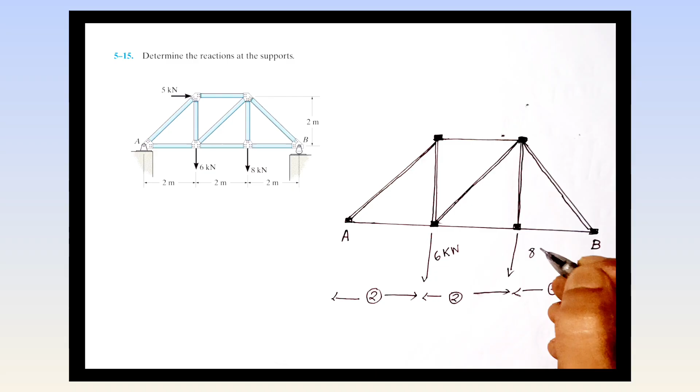At the end of the 2 meter section, the question drops two forces: one 6 kilonewton, other 8 kilonewton. The height h is given as 2 meters, and suddenly from above a 5 kilonewton force attacks to the right side. Show that at height 2 meters, a force of 5 kilonewton acts to the right side along the positive x-axis.

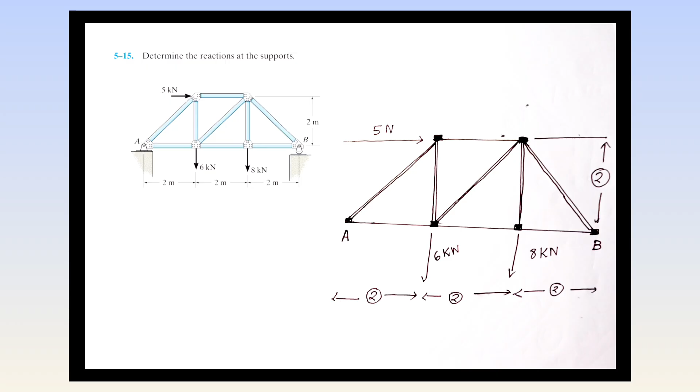So tell me student, what is my approach? What is point A? Here point A is a pin and point B is a roller. Note down: at point A we have a pin support, and at point B we have a roller support, basically the lazy cousin of the pin which just likes to roll around.

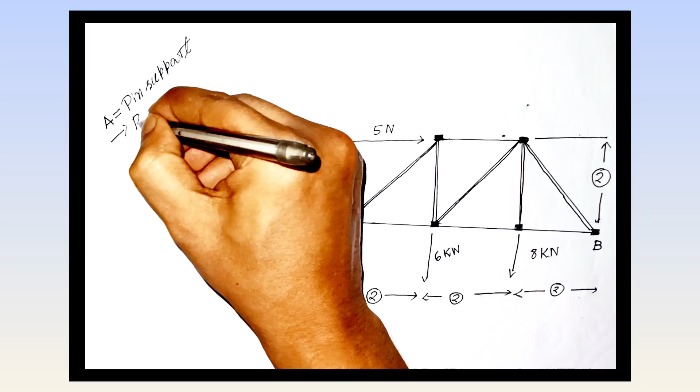At point A, two reactions come as a combo pack: one is Ax, other is Ay. This Ax reaction direction is along the negative x-axis, that is the left hand side, and this is Ay, obviously upper side, because here 6 kilonewton and 8 kilonewton act lower, so Ay must be upper, otherwise how would it be in equilibrium? So B equals roller support, not pin.

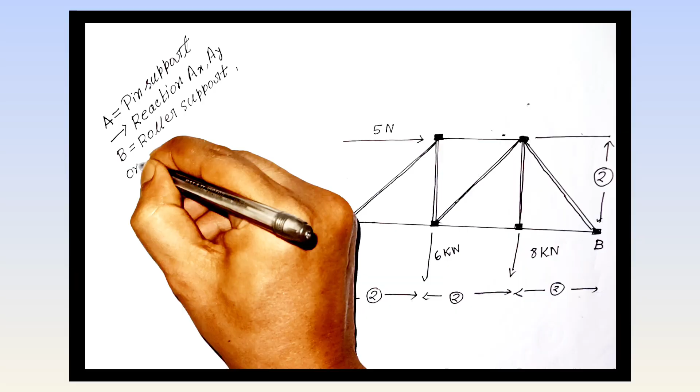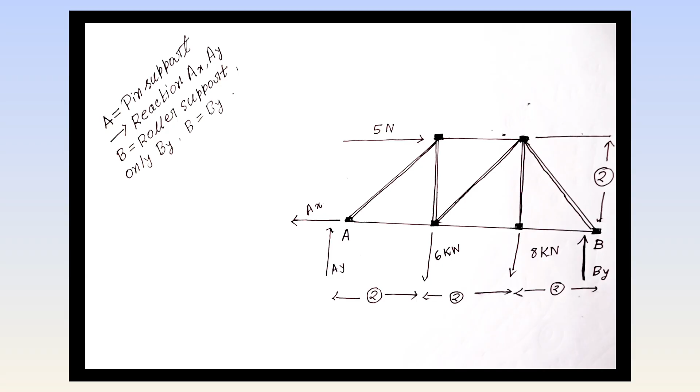So at point B, can you tell me how many components, no component or one component? Drop your comment. Yes, only one component, that is By, no Bx — roller support. B point has only By component, but at point A both components, Ax and Ay. So the unknown terms are Ax, Ay, By. B equals By.

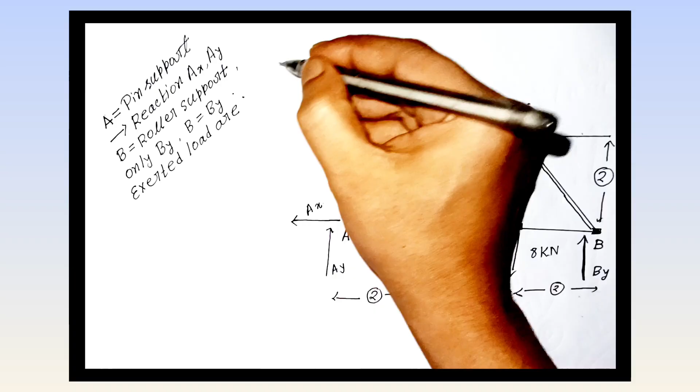Tell me dear student, what is the exerted load? It's 5 kilonewton upper side to the right hand side. Note down, exerted load is 5 kilonewton — sorry, not Newton, this is kilonewton, question says that, not me. So the exerted load is 5 kilonewton to the right hand side along the x-axis.

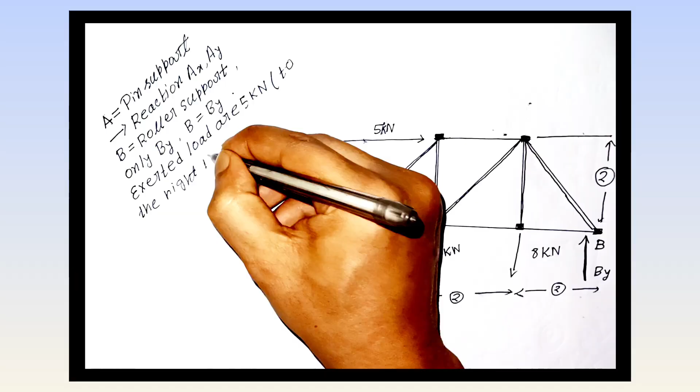Anyway, one force is 5 kilonewton, but the question says there are two other forces: 6 kilonewton and 8 kilonewton. This is minus x, this is plus y, this is minus y, this is plus x — the axis, x-axis, y-axis. At 2 meters from point A, the 6 kilonewton force acts.

That is, you can write 6 kilonewton downward along the negative y-axis, at 2 meters from point A. Note down: 6 kilonewton downward at 2 meters from point A.

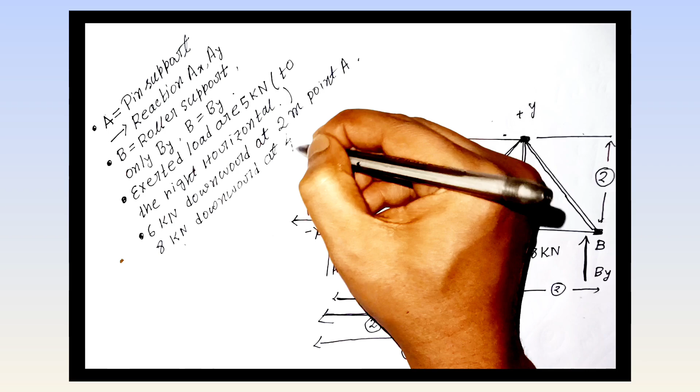Similarly, an 8 kilonewton force acts downward, but not at point A — it's 4 meters from point A (2 plus 2). That is, we can write 8 kilonewton downward at 4 meters from point A. 6 kilonewton at 2, 8 kilonewton at 4, from the same point A.

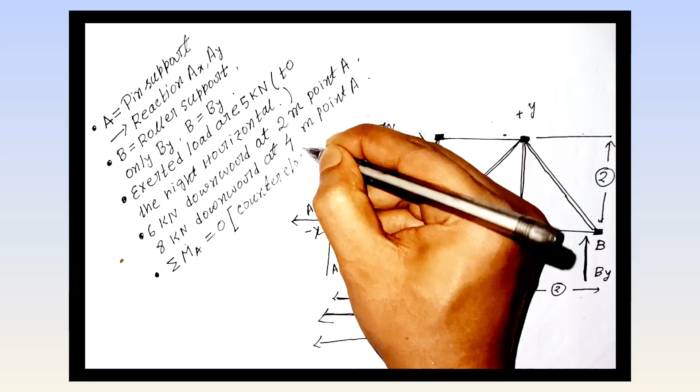Next, let's calculate counterclockwise: summation of moments equal to 0. Now you need strong observation power — watch the drawing. Counterclockwise, remember I make this easy peasy, no tension, very simple, wait and watch.

So this is 6 kilonewton, what is the perpendicular distance? 2. 8 kilonewton, perpendicular distance 4. And By, perpendicular distance 6. So: 6 for 2, 8 for 4, By for 6. That is written as plus By into 6, since By is upper hand, minus 6 kilonewton into 2 since it's downward, minus 8 into 4, equal to 0.

Because summation of moments equals 0, you can calculate and simplify, and the answer automatically pops out. Calculate By — here is no place to write, so I write here. By equals... that is By equal to 7.33 kilonewton.

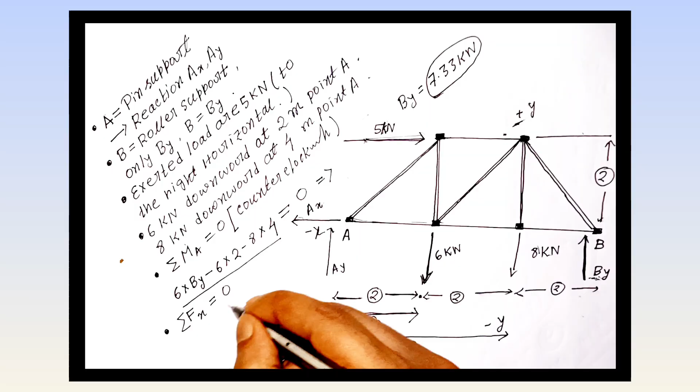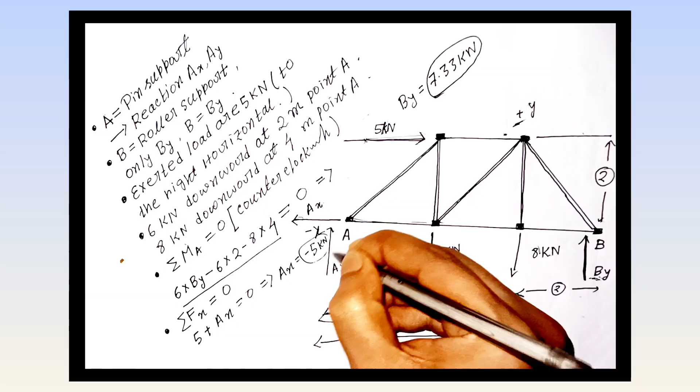Next, summation of Fx equal to 0. Along the x-axis there are only two forces, 5 and Ax. Very clear, very simple: 5 plus Ax equal to 0, that is Ax equal to minus 5 kilonewton. This minus is the negative sign — already I put negative, Ax is on the left hand side, minus x-axis.

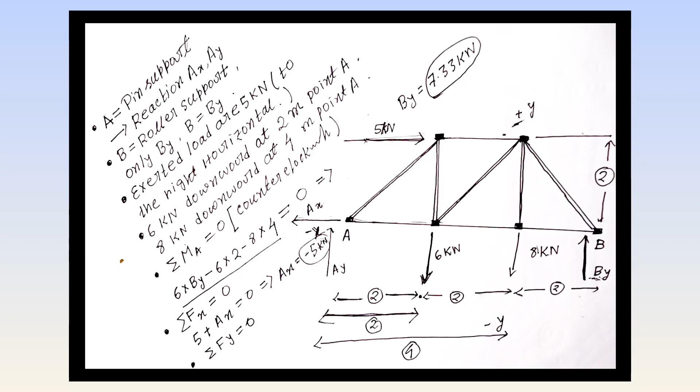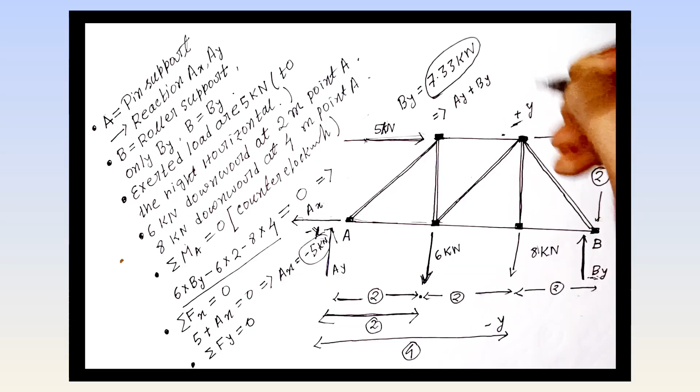Now last step: summation of Fy equal to 0. Along the y-axis we have Ay, By, 6 and 8 — four forces. Upper side Ay and By are positive since upper side means positive y, and 6 and 8 are minus, downward according to the axis, equal to 0.

We already know the value of By, which is 7.33. So easily putting the value of By, you can find Ay. Ay is 14 minus 7.333, so Ay equal to — drop your comment — 6.67 kilonewton.

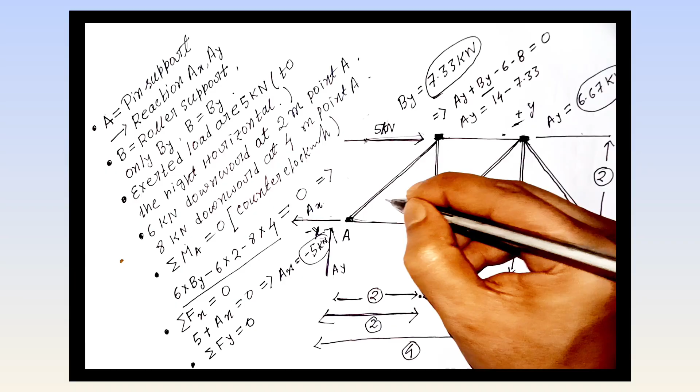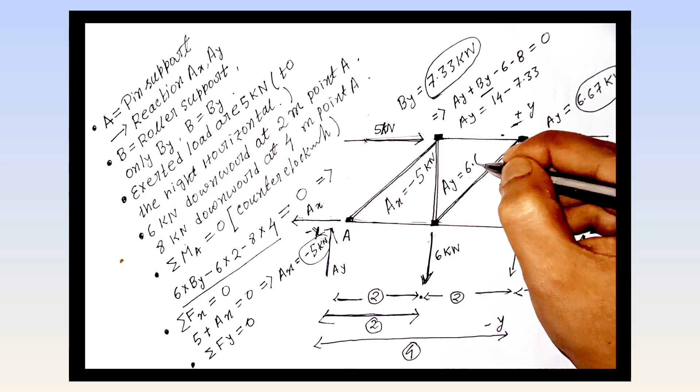So Ax, Ay and By — three circles, three answers. Ax equal to minus 5 kilonewton, Ay equal to 6.67 kilonewton, and point B has only one component, By, not Bx — there is no other component. By equal to 7.33 kilonewton.